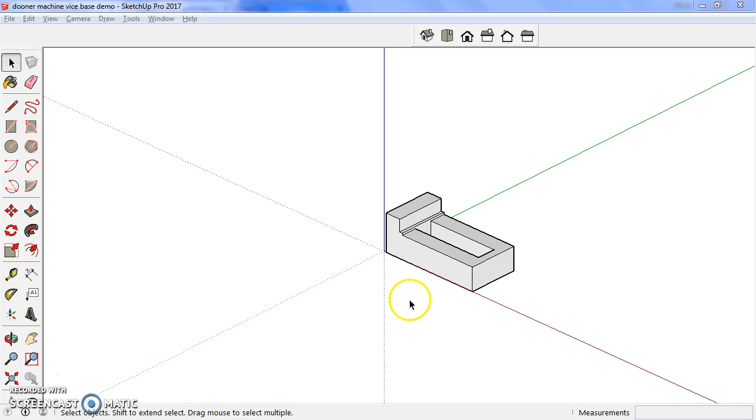Firstly, we're going to draw the hole through both ends, and then we're going to create the boss on each end as required.

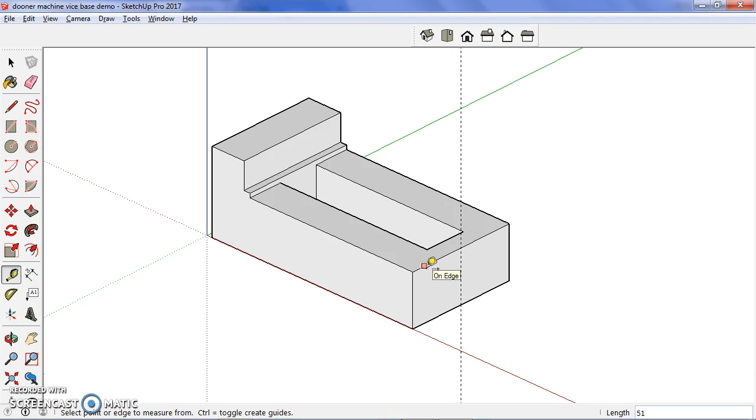Using the measuring tape tool, we'll find the center line. We then come down from the top a distance of 16 millimeters. Type that in.

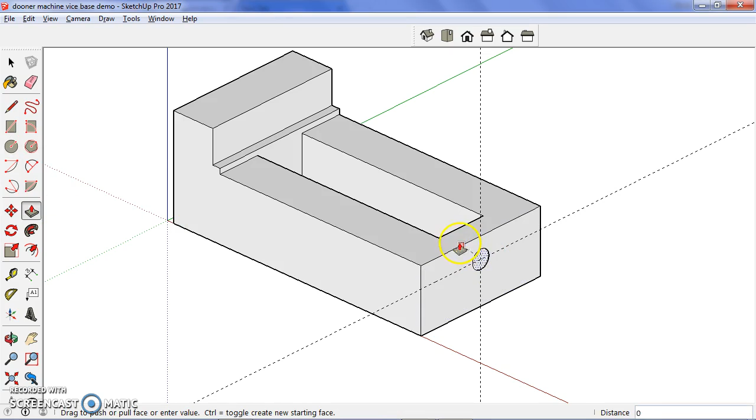At that point, we're going to draw a circle on that end face, dragging it out, and the diameter of that circle is 14, so we're going to make that 7 radius, and enter, and that gets push-pulled through to that other surface, and I've just referenced that to the edge. Check that that's gone through, and that's correct.

Okay, we're going to transfer those heights around to the back of the drawing. Guideline to there. Guideline to there. Find the center line.

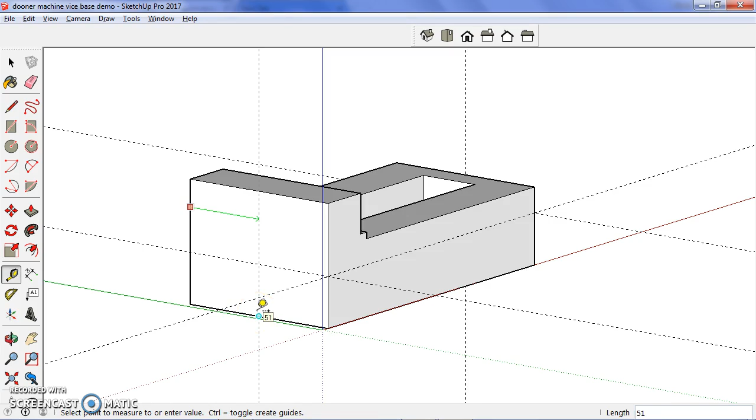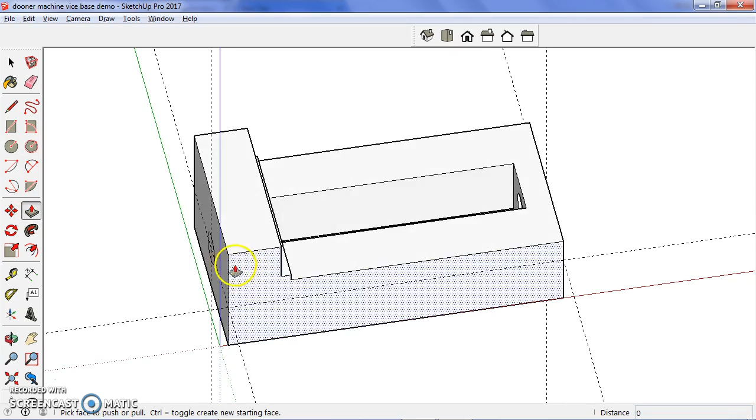This time the diameter of the circle is 20, so we type in a radius of 10. Now we need to change our angle so that we can pull that through onto that edge. And that hole's created. Excellent. I'll clear away those guides.

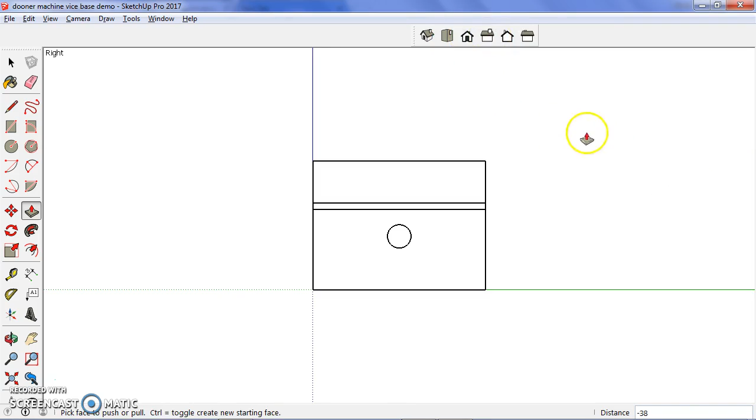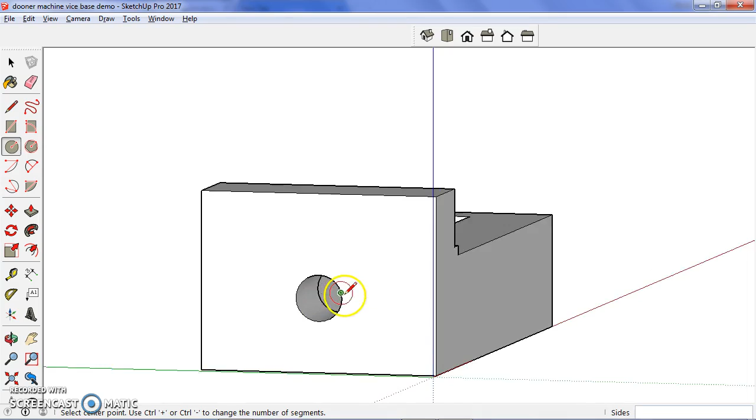And now to draw the boss. The diameter of the boss is 38. So we just need to pick up the center point. Having trouble with that center point on there. We might use our offset tool.

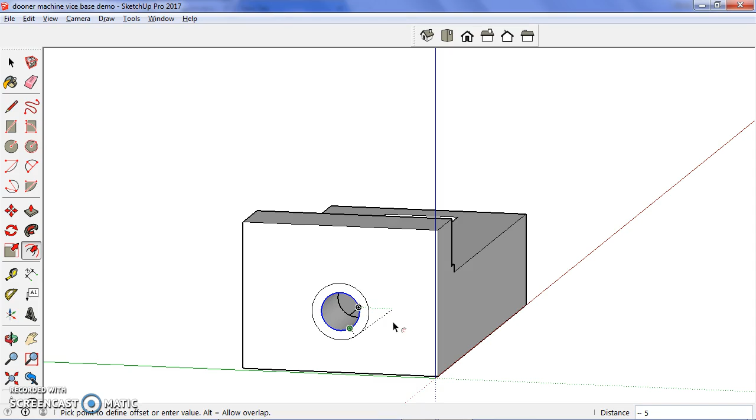So that is 20, needs to go to 38, that's 18, so we're going to increase that by 9 millimeters. Create that boss. This in turn needs to push-pull out by... no, in this case it's 5 millimeters.

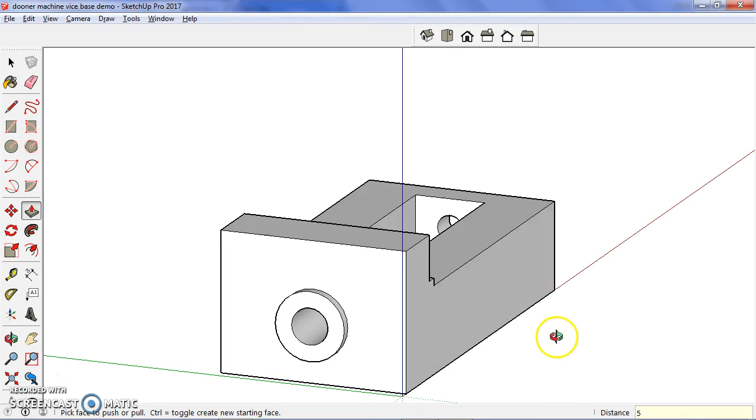I'm going to leave that at that stage, but later on we will need to draw a curve at that point. So repeat that at the other end.

Offset, drag it out. The size of that is a radius of 7, and it needs to be a radius of 12.5, so that will be 5.5 millimeters. And we bring that out 3 and enter.

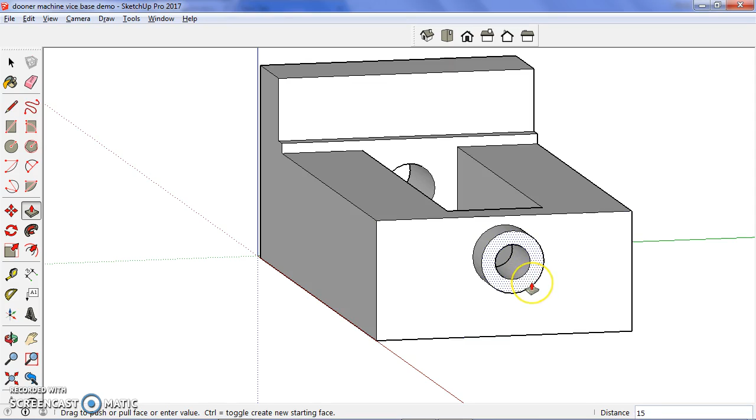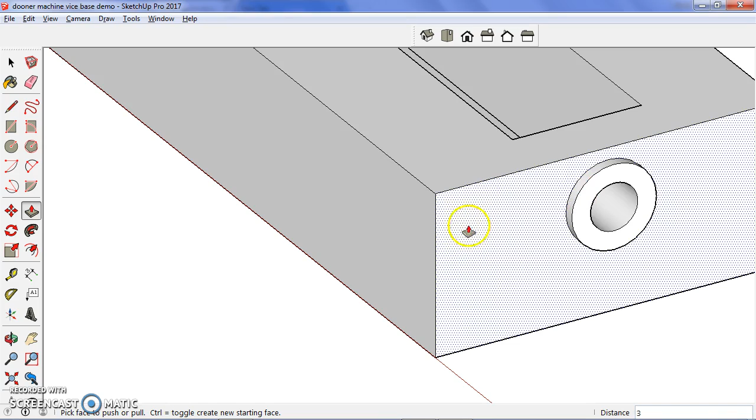Now we need to draw the radius around the edge. This is to show that that is not a machined surface, it's part of the casting. The easiest way to do that is...

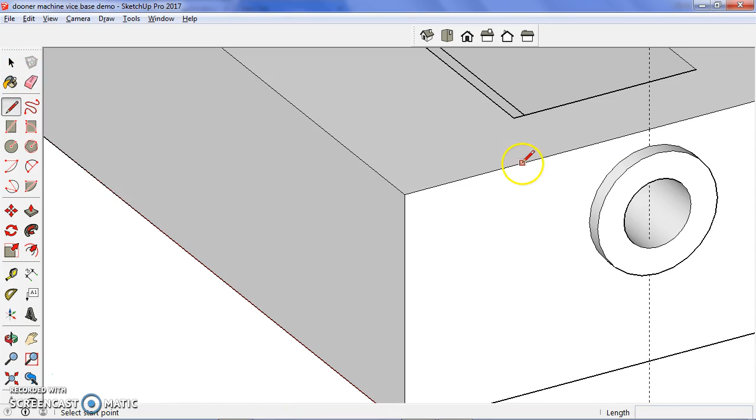Grab a guideline, draw a line from that endpoint out on the red axis. We're now going to draw that up 3 millimeters. Give us those 2 points.

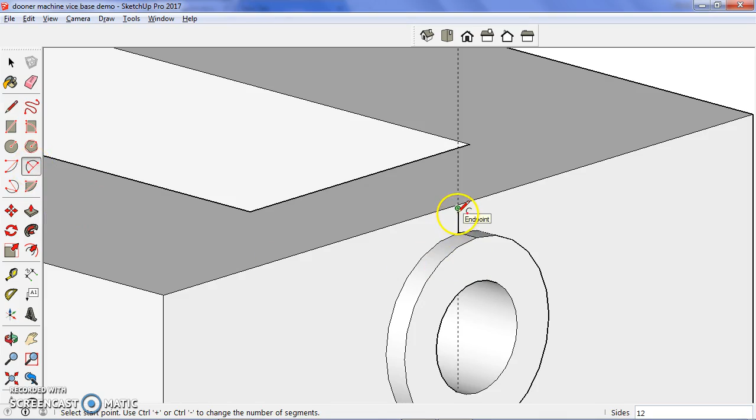We now draw an arc, a 2-point arc from that point to that point, and be very careful to make sure that you slide along that line and pick a tangent to create that surface.

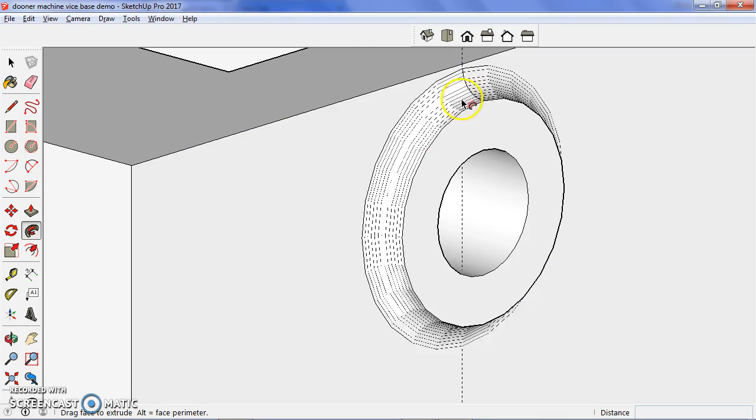Center that, select follow me around the circumference, and that's created the boss, and we will save.

Rotate to the other end, carry out that same process. So we want a guideline across to the center line.

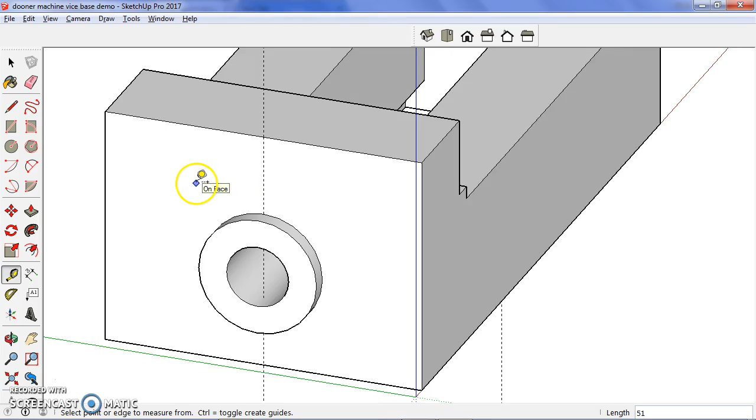And draw a pencil line up 5, and a pencil line on the red axis to the end, 2-point arc.

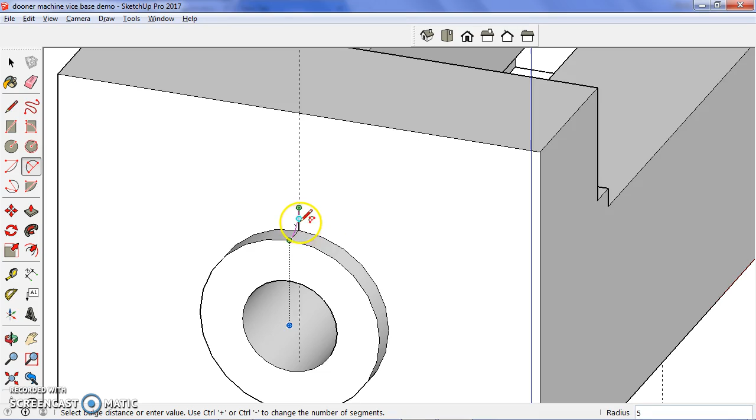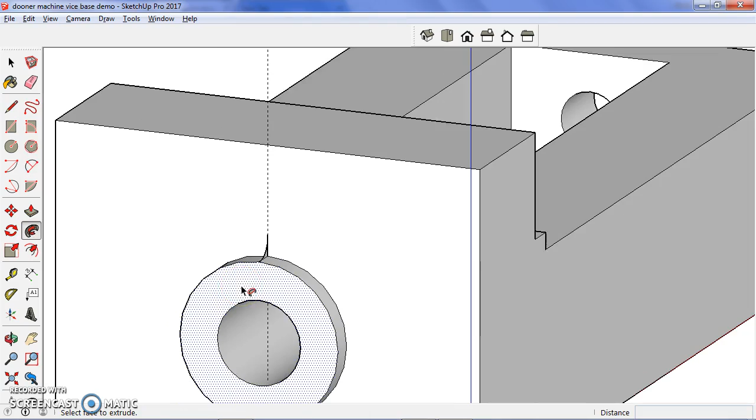Make sure that we are on that line, and again follow me, and that's the boss. Save.

Only 2 other minor details to put in, and they are 2 holes in this surface so that we can attach the jaws. They are 13 millimeters down from that surface.

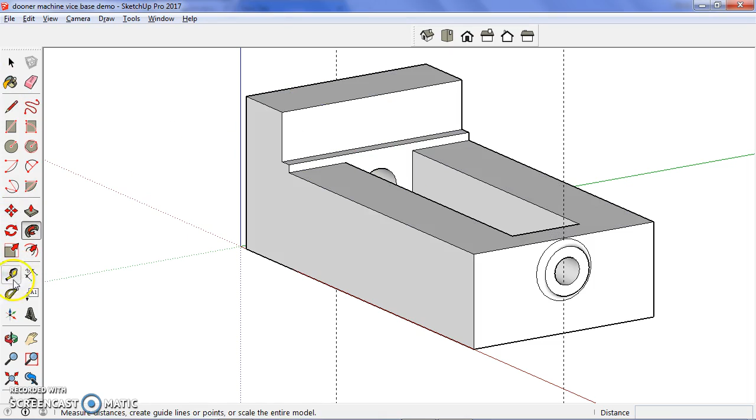And then we'll take the distance between the holes from the grip plate, and they are 56 millimeters apart and 23 from the end. So we measure in 23, and then 56.

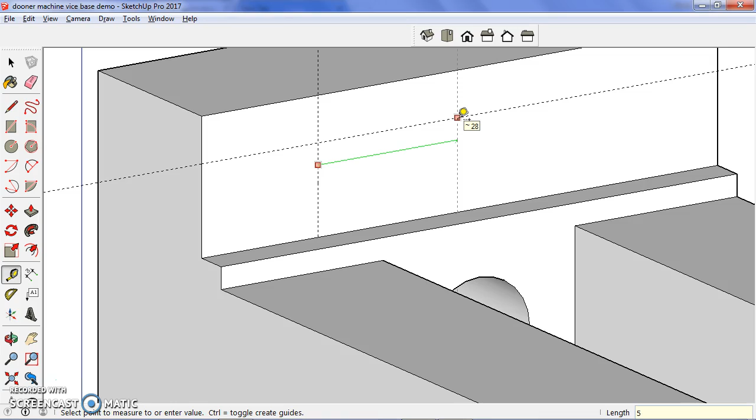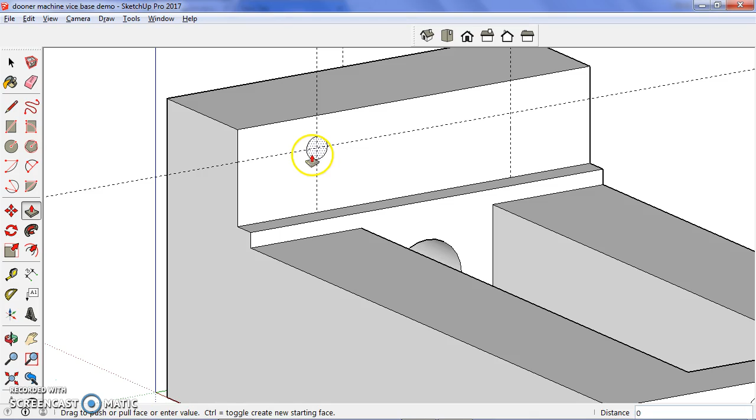And we have a circle there. Diameter is 6 because it is an M6. We drag that out so it's at 3 mil. And that needs to be pushed in, this time not all the way through, to a depth of 13 millimeters. And we're in business.

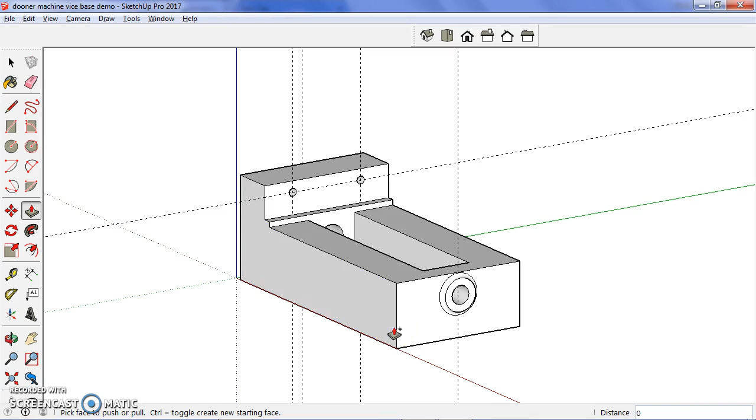And save. And that is our completed machine base. So let's delete the guides. I'm going to select all.

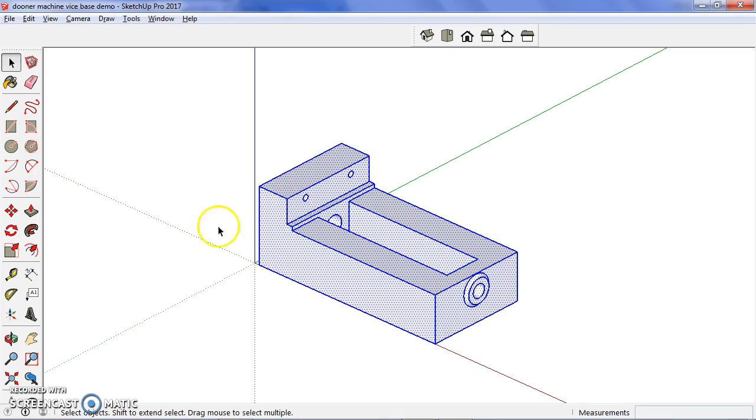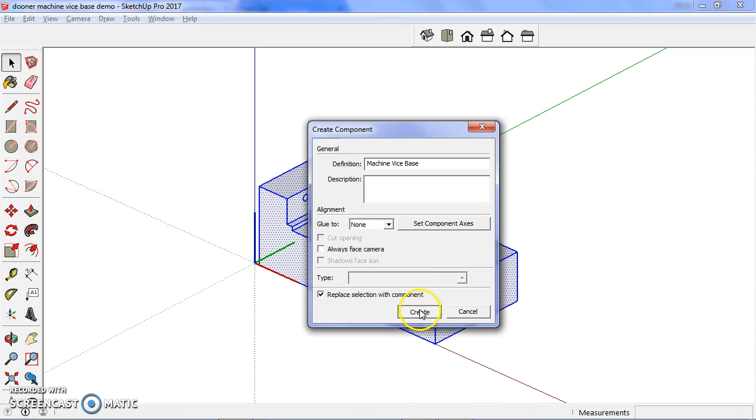Right click, and I'm going to make that a component and call it Machine Vice Base. Create. So that component will stay in its own drawing, but we're also going to put it into the general assembly drawing once that's completed.